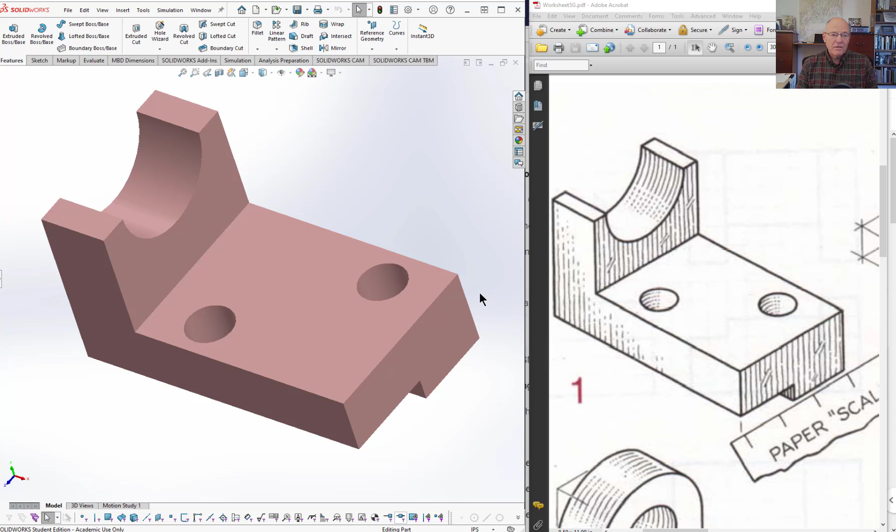This is the second object. This is what the drawing of it looks like. That's an isometric drawing, by the way, and these drawings I select from Giesecke. They're all drawn by hand. I like the way they look, and they give me a group of examples of things that you need to produce. So once again, we'll come over here, we'll rotate it around like this. And like this.

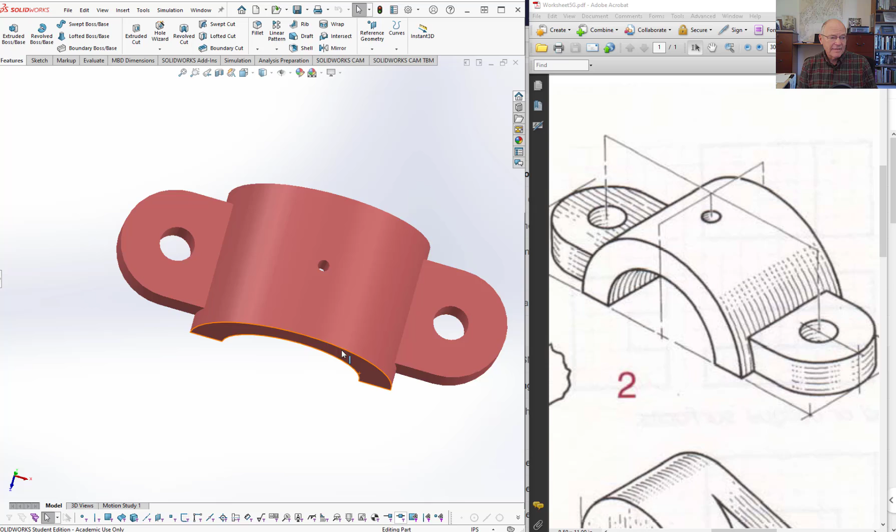Object number 2, right view shows you what the sketch looks like, the left view shows you what it looks like in actual life. Rotate this one around. And then we'll do it this way.

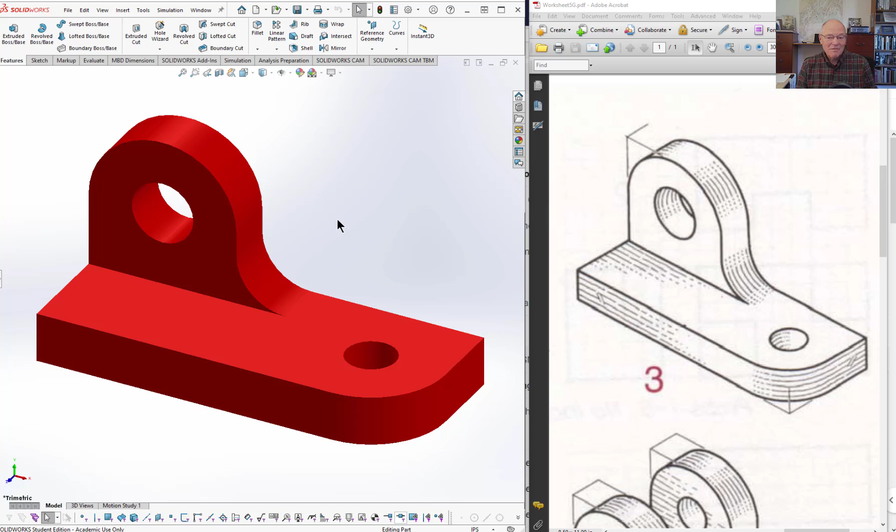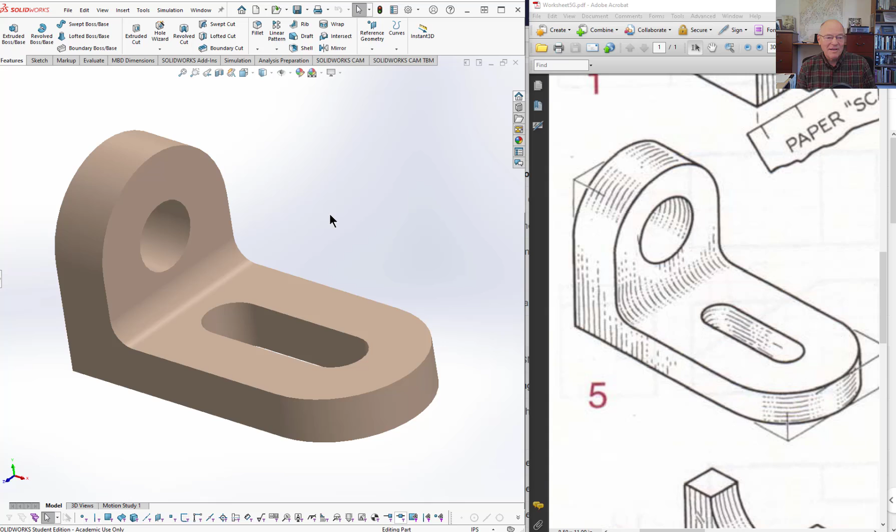Looks like that. This is object number 5. There's no object number 4 because the sheet that I gave you cuts off one whole column of these little parts just to reduce it from 16 to 12. Once again, rotate it around so you can see what it looks like. And we'll do it this way. Clicking noise you hear are my arrow keys that I use to do the rotation in SolidWorks.

Part number 6, drawing on the right. One thing to keep in mind here is you've got a tangency here where that flat surface transitions onto the cylinder. You can see it over here like that. That tangency is right there. That's where the transition takes place between a flat surface and a curved surface. When you draw this, don't forget to project that feature down from the top view, or from the front view could be as well, but that you understand when you sketch this where that tangency is. And you'll notice there's no line going through here.

Rotate it around. And rotate it this way. And I am, yes, purposely avoiding rotating it into the 3 primary positions because I want you to be able to visualize that.

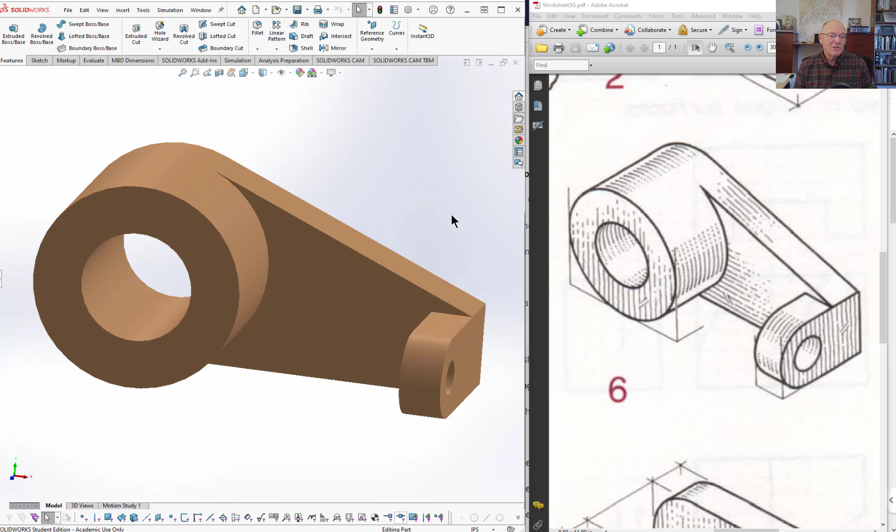Part number 7, drawing on the right, object on the left. Here's a case where it might not be obvious how far down that goes, but you can assume, especially on these, that any place that looks like it has an opening that goes all the way through does. This is how it looks as a model. You can see that slot does go all the way down through. Then we'll rotate it this way.

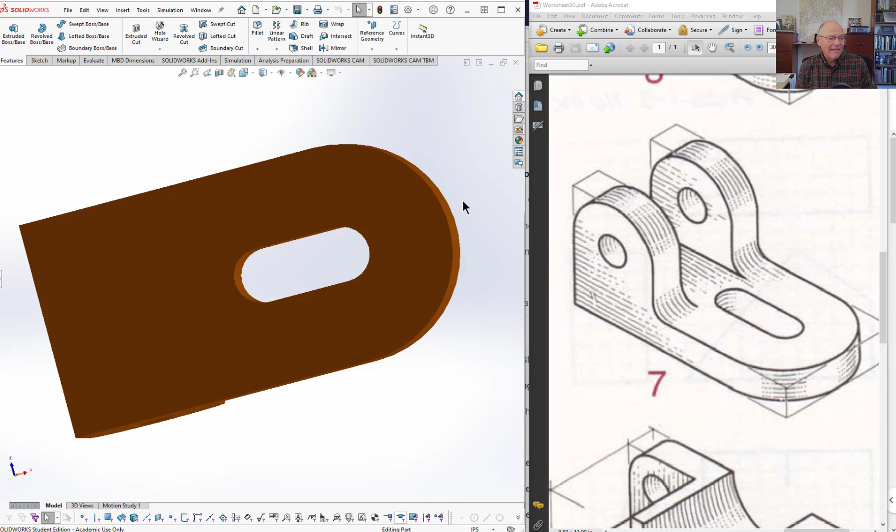Part number 9. Again, there is no part number 8. That would be on the last column over. This part has 2 different features in the front and the rear. This is the kind of thing where it's possible you might just choose to draw both a front view and a rear view. In this particular case for this exercise, I just like a front, a right, and a top, even though I might in fact draw this with a rear view so that I can show that clearly. But I want you to show whatever view you select with hidden lines. That's what the part looks like as we rotate it.

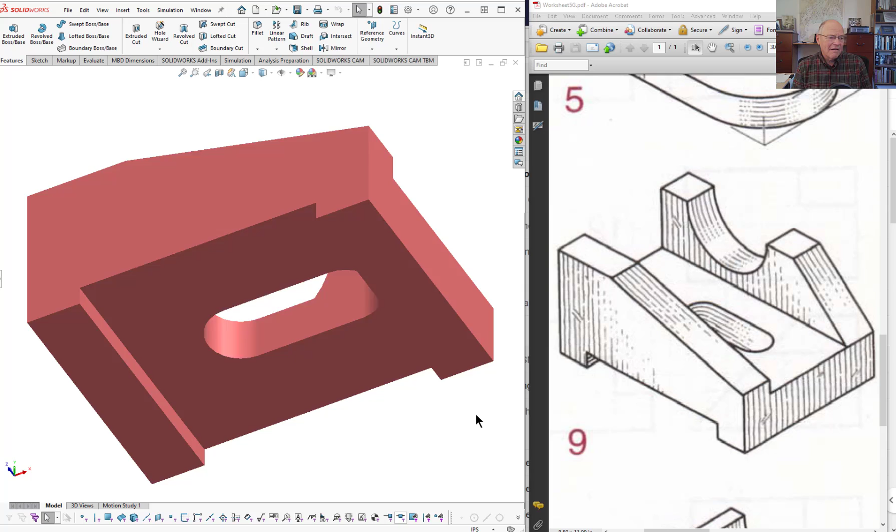What it looks like that way. It's like I may have placed that slot a little, I guess I made that slot a little longer than it really would be. If I take a look at it over here, I'm going to pause and change that. I just made a change to the slot. I think it actually does look a little more like the drawing now.

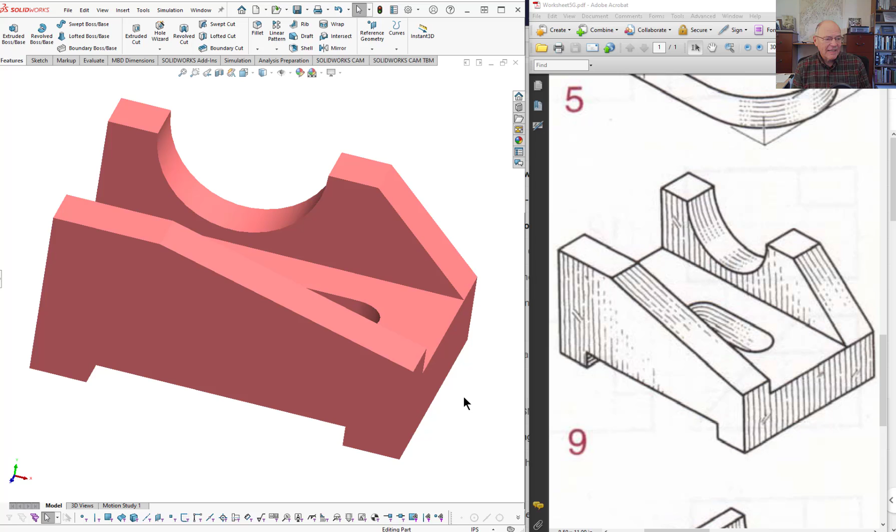You don't have to make this exactly the way the drawing looks either, as long as you've got all your views properly projected. So now when I roll this around, you notice that it looks a little different in the bottom now. And then once more this way. Part number 9. Part number 10.

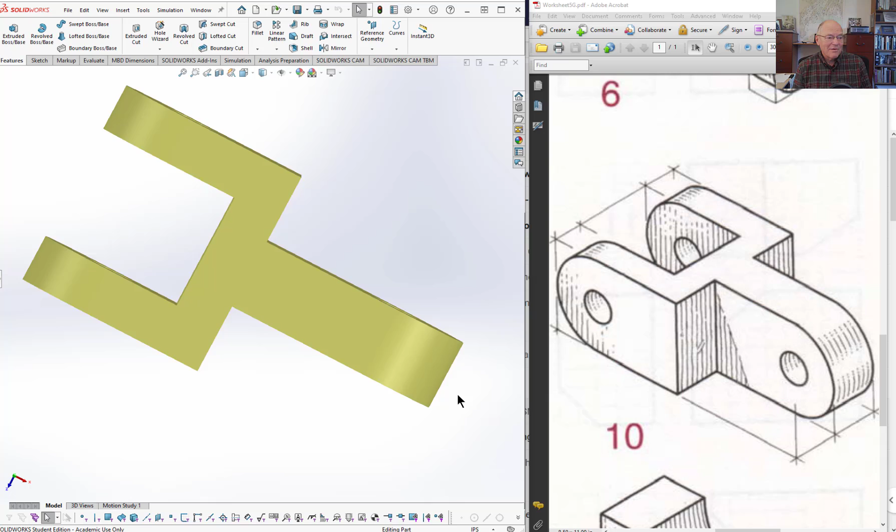Notice I'm trying to make my arrow keys a little less noisy.

Part number 11. Yeah, there's no significance to that being orange. I just happened to have had my cursor on it when I started, so it highlighted it. So I'll take it off and rotate it again. Get back to the isometric view, then we'll rotate it this way.

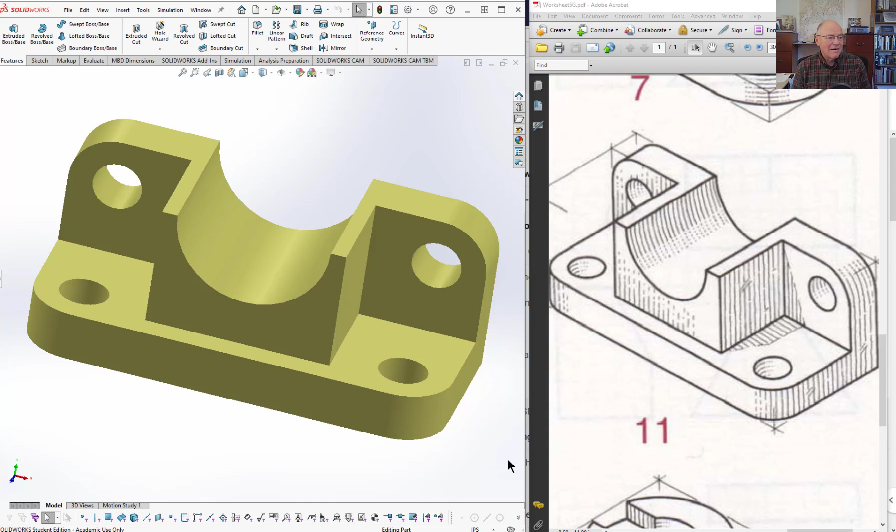Part number 13. You'll notice the reason for that little break there, that's not actually a part of it. It's because the way this is sketched, isometrically it would look like that, and without breaking that out, it's not clear that there's a hole back here. So that was just done as a short break line. That's a convention in technical graphics.

What isn't a convention, by the way, in technical graphics is to do this shading when you're doing orthographic views. This is not an orthographic view. It's an isometric view that's known as a pictorial. It's meant to be a picture of what we're looking at. So it's clarifying what the part looks like, but it's not a technical drawing of that part. You never put that kind of shading on a technical drawing.

Those lines are section lines. Those would be on a technical drawing. But again, the purpose of this break here is just to show you that there's a hole back there. Now, if they'd done this a little different orientation, it could look like that.

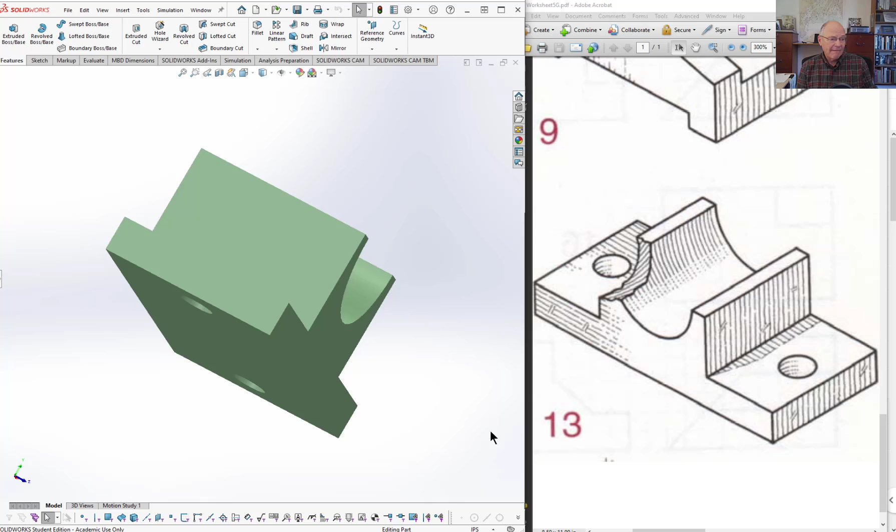But back when we did drawings by hand, isometric drawings were always done with a 30-60 triangle. A 30-60 triangle would allow you to draw angles at 30 degrees, 60 degrees, 90 degrees very easily. And so that is the orientation that most isometric drawings were done at back then. Rotate this one around. And it looks like that. Part 14. You notice the holes go all the way through.

And now we'll go on to the last one.

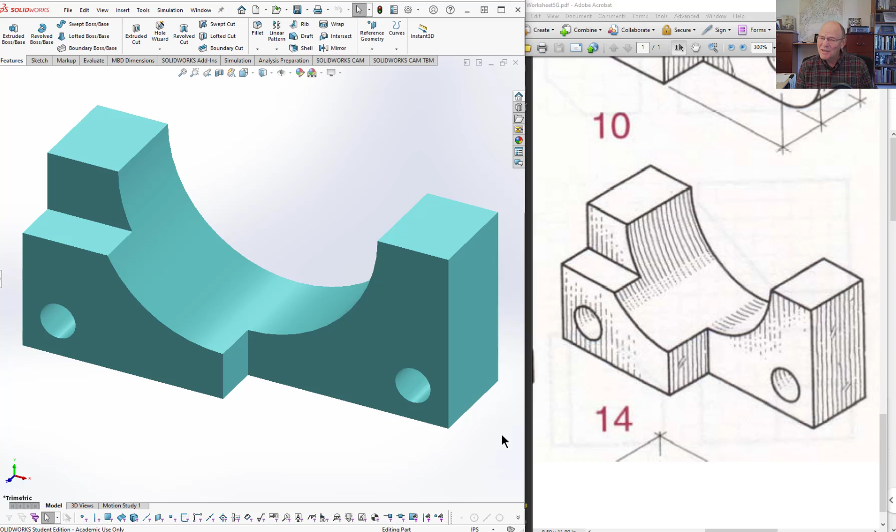I feel like I should be playing music in the background like some of the videos that do how-tos, but I don't really like watching the videos that have music in the background, so I'm not doing it.

And here's the last one, number 15. What you have right there, that little pocket, would be a counterbore. A counterbore is simply an opening around a hole that is larger than the hole and provides a shelf where you can actually put a washer, for instance, in there. So when you bolt this down, the washer can sit uniformly around the part.

This part probably, well, it's not drawn as a cast part, but anyway, this is what it looks like over here. We'll rotate this one around. Don't forget you've got a tangency here as well, but there's no line shown when we draw this. Even though there is an edge here from a computer's point of view, that edge is invisible because the transition from that surface to that surface is a smooth transition.

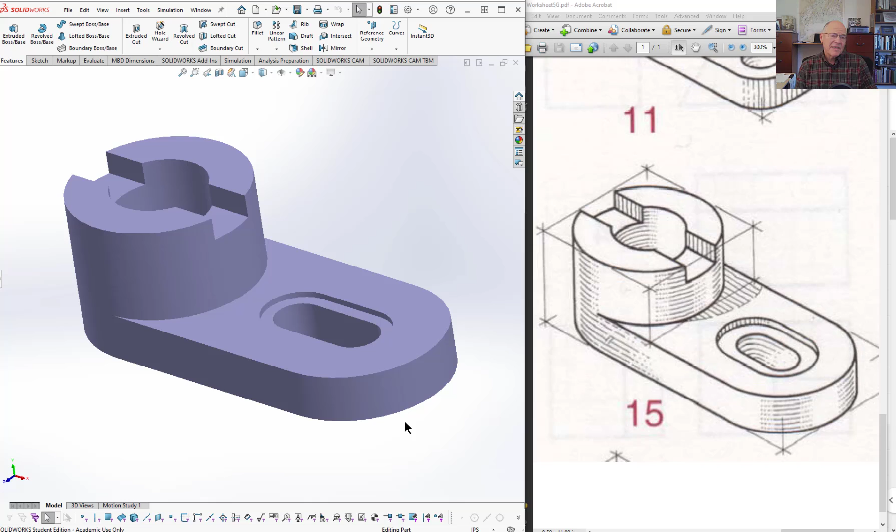That's it. Go ahead and start sketching, or finish sketching if you've already started, and just go back and confirm that your view of what you're looking at is the same as the actual part. Again, the key thing here is to draw consistently with object lines that are thick, hidden lines that are thin, center lines that are thin, view placement being correct, and make sure you get all the details in all the views that are necessary.